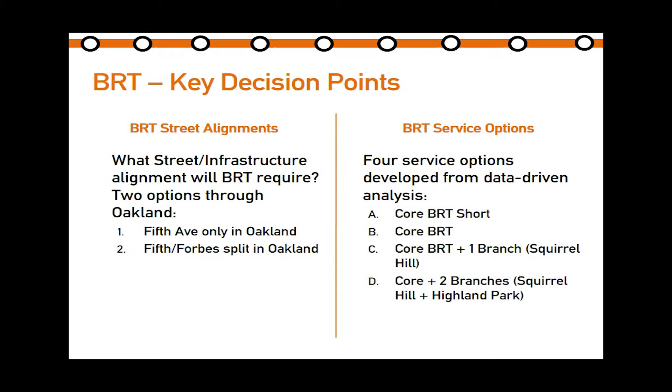So in a nutshell, what will this project be? The first goal, of course, is a fast transit system—saving time on trips from downtown to Oakland, to the East End, using dedicated transit lanes and dedicated transit signaling. It needs to be frequent, so we're looking at 5-minute or better headways during peak hours, so you can reliably catch a bus anytime you need to. As the county executive mentioned, the vehicles will be very distinct, so they're branded vehicles.

They have features that are above and beyond what you find on a normal bus. The stations also have more features—larger stations with real-time arrival information, ticket vending machines, and other features way above and beyond what you find at a normal station today. And of course, connected—connecting all of our major job centers, linking downtown, uptown, Oakland, and points in the East End with a rapid one-seat ride.

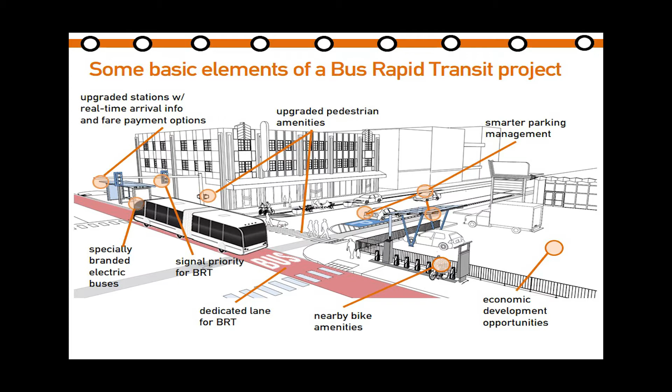There's also other amenities nearby, bike amenities. We've got plans to manage parking smarter, and we have economic development opportunities that open themselves up around station areas.

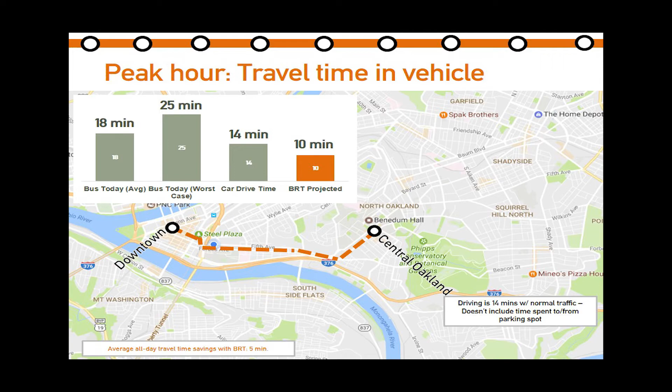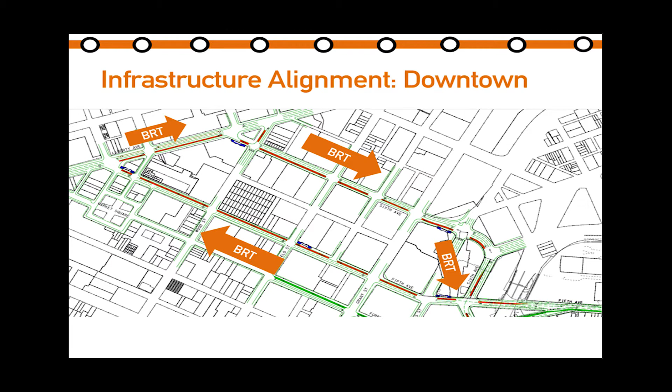Some key points about the actual infrastructure alignments. The way it would function downtown is actually somewhat similar to how Oakland buses circulate today, except the loop would be reversed. The BRT vehicles would come into downtown on 5th Avenue, make a right turn onto Liberty, a further right turn onto 6th Avenue, and head outbound. This is a zoomed in version of what that looks like.

So why this particular alignment? This is similar to the current operations, so people are already familiar with where Oakland buses go. Building up really prominent station areas will only further solidify that. We're also looking to locate station areas near other rapid services, linking with the light rail system and other stations that serve the busways in the region.

It's just more efficient to make right turns, especially downtown. You know how some intersections can get gridlocked, so if we're shifting that pattern, anything we can do to speed this service up is something we're looking at doing.

The pedestrian circulation around the crazy intersection at Liberty Avenue, 6th Avenue, and 7th Street would be improved through the Wood Street Station area, trying to make that circulation a bit better. We know we need to provide safe pedestrian access across Liberty Avenue to serve the cultural district, so that is a key part of that station area plan.

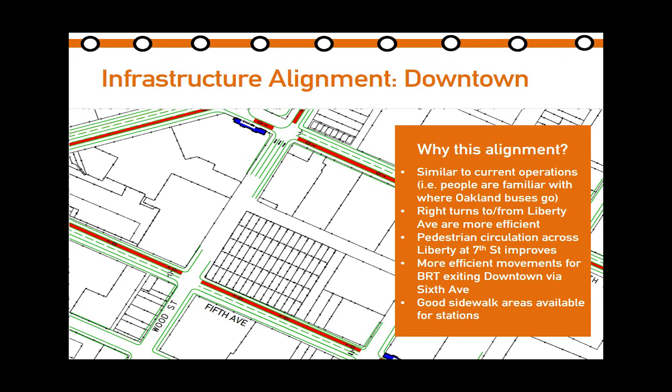Overall, more efficient movements for BRT as it exits downtown via 6th Avenue—another key pinch point that I'll talk about in the next slide.

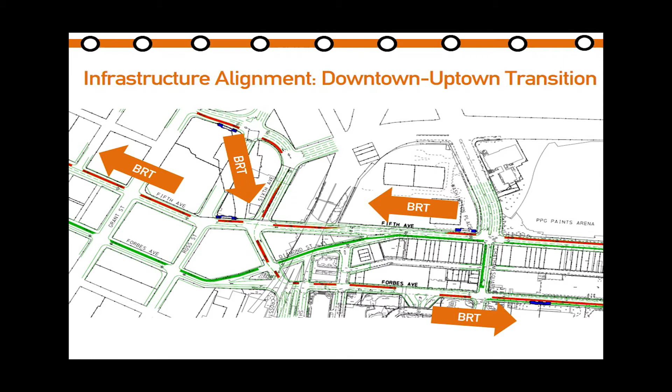This transition area between downtown and uptown is another very unique Pittsburgh situation, with multiple key arterial streets crisscrossing each other at strange angles. What this BRT system would do, exiting downtown via 6th Avenue—currently it makes a right from 5th Avenue, and this intersection at 6th and 5th is very congested—is allow BRT vehicles to circulate through here a bit easier. You can also see the green lines on the map represent where we would be building dedicated bike infrastructure as well.

A few brief notes about Uptown. We've been working over the past 18 months or so on a plan called the Uptown Eco Innovation District. It's been a major initiative that not only helps us understand what we should do with the streets in Uptown and solve a lot of Uptown's mobility issues, but has also helped us identify other projects we could implement to further capitalize on the potential for new development in Uptown as a result of bus rapid transit.

Looking at infill housing development, better stormwater management, things like safer intersections, more street trees, better lighting—these are all things that Uptown community members have identified as major issues we are hoping to address through this project, with BRT station areas being key among those.

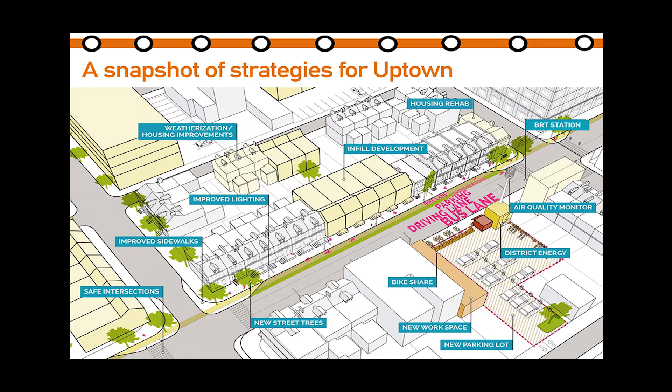One of the recommendations of this neighborhood plan that we've been working on with the community is to implement bus rapid transit as a way to address a number of community priorities. So one of the things we've identified through that planning process is what the alignment in Uptown should be.

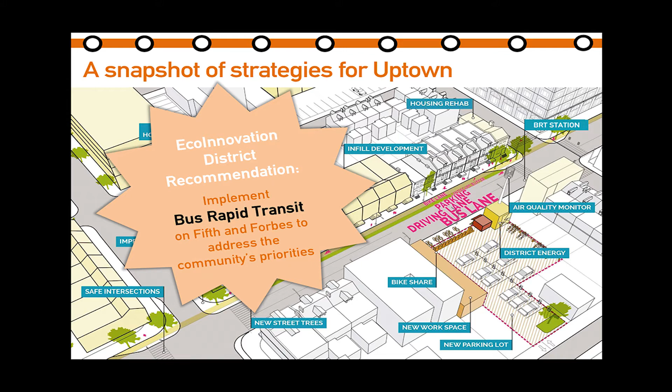Here's a quick rendering of a multimodal reworking of Forbes Avenue—a section where you see a car lane, a dedicated BRT lane with a station that has an accessible entrance, and then a bike lane that circulates behind it, along with more street trees and better lighting.

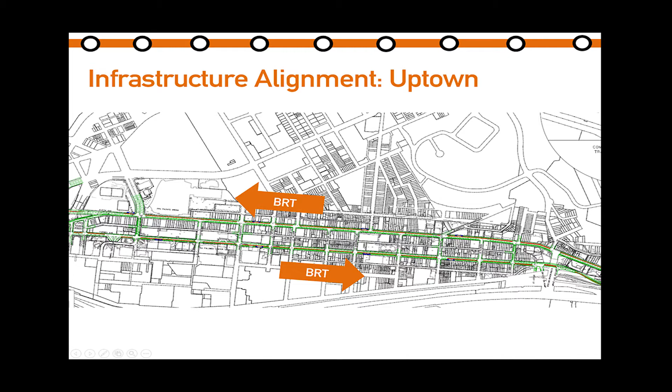Part of that has also been helping us to identify what the alignment should be. Looking at circulation, we've got everything, all modes from bike, car, BRT, everything flowing towards Oakland on Forbes Avenue, and inbound towards downtown on 5th Avenue, similar to how it functions today.

But the difference between how it functions today and what this would be is a balanced allocation of street space. Every mode gets its own dedicated space. It allows for intuitive circulation, meaning everything flows in the same direction. So if you're on a bike, on a BRT vehicle, or driving, you know which way you're going, all the modes are in the same direction. It allows for those in-street island stations like you saw in the rendering.

We have more space in places that aren't station areas to do innovative stormwater management approaches. Uptown is a key area for PWSA in terms of stormwater management, and so we're helping to address some of those problems through this project as well. Of course, having the BRT on both streets spreads out the economic development potential, having stations on both streets.

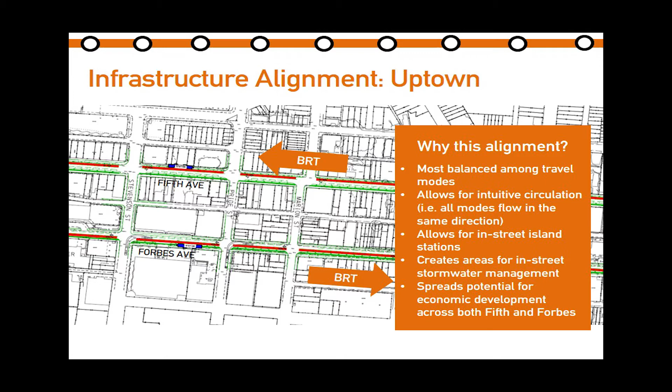Looking at the Uptown to Oakland transition area, another one of our very Pittsburgh pinch points where you've got a lot of different roads converging in one place. We're looking at the same circulation, with BRT on Forbes Avenue towards Oakland and towards downtown on Fifth Avenue. Some notes for this section.

What we're looking to do is add capacity to Forbes Avenue between Boulevard of the Allies and Craft Avenue. This section, if you're familiar, as you make that turn from Forbes Avenue headed uphill towards Oakland, it's a pretty notorious spot for backups. There's a lot of congestion at that point. So through this project, we would be adding a BRT lane as you approach Craft Avenue, but also adding more space for the road in general so that overall circulation into Oakland happens much smoother than it does today.

It allows for that reliability of the BRT, but it benefits all modes, so it minimizes overall what we're calling person delay for everybody heading into Oakland. What we're looking to do with that capacity addition is basically reduce the travel time in that section, from around Birmingham Bridge to Craft Avenue, by between 50 and 60%, which is significant over what the experience is today.

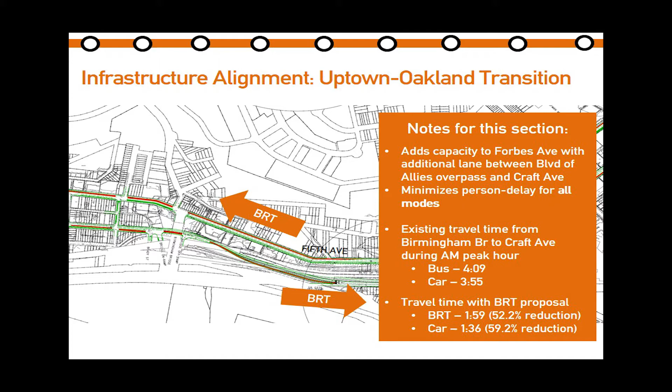And then in Oakland, we're looking at two different options. We have some notes about each of them that I'll share with you, but one of them, what we're calling option one, is having all the BRT on Fifth Avenue. Zoom in version of that, and you can see how that operates.

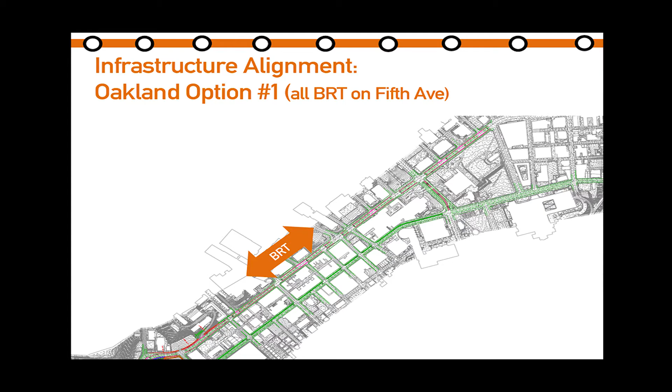You've got the contraflow bus lane that exists today. We would be maintaining that, but adding station areas. We have a dedicated inbound BRT lane that would be added. Bike infrastructure in this scenario would be on Forbes Avenue.

Through some of the work we've done with our stakeholders and other community partners, as well as analysis we've done with the Port Authority, we have some concerns about it, and we want to make sure that as we go forward with the public process over the coming month, that we're on point with this, and we want to verify that these observations are correct.

So, if anybody's familiar with how the contraflow bus lane works today in Oakland, there's a fence along Fifth Avenue on the southern side for a reason. It's confusing for visitors, and there are quite a few of them, with the hospitals and the university. So that conflict there, in this scenario, would be maintained, and it's somewhat of a concern in terms of people walking in that area.

In this scenario, all the transit would be moved to Fifth Avenue, which folks on Forbes Avenue and the business owners there have told us they really like, the exposure of having transit riders at their front door and the good visibility of foot traffic that provides. The bike infrastructure through Oakland is a vital connection, getting downtown to Oakland via bike safely.

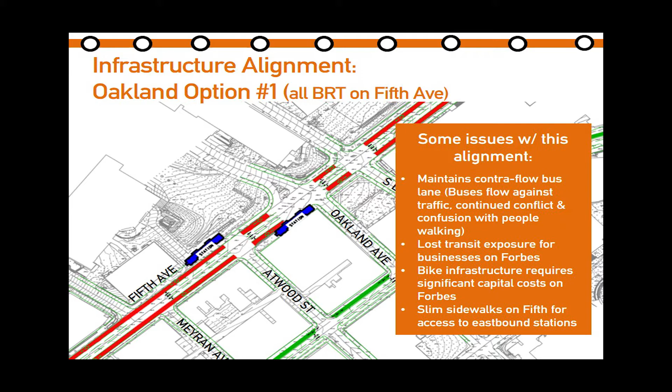It's a bit more capital intensive to do that on Forbes Avenue here. And again, the sidewalks on the southern side of Fifth Avenue are pretty narrow, so for overall pedestrian circulation, it's not ideal. The other side of this is option two, where we split the BRT between Fifth and Forbes, similar to operations in Uptown.

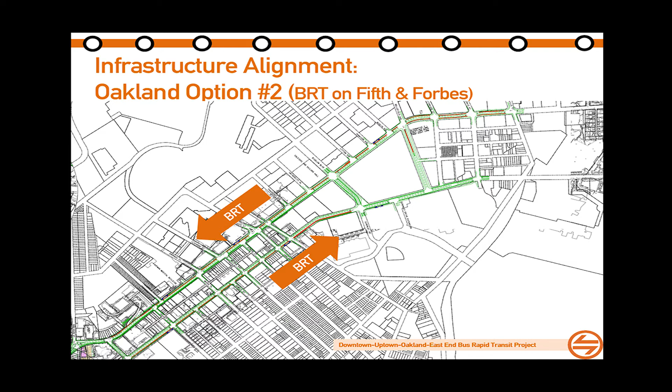We'd be maintaining that same flow. This option formalizes what is almost a de facto transit lane now on the south curb of Forbes Avenue, on the right side if you're headed in that direction. We would formalize that as a BRT lane, maintain inbound traffic for BRT on Fifth Avenue, and where there's currently a contraflow bus lane on Fifth Avenue, we would change that into a two-way protected cycle track.

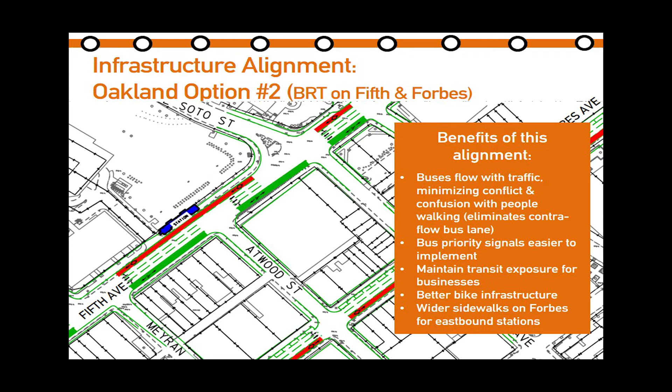So again, balancing out the modes in Oakland, spreading it out between Fifth and Forbes. The benefits of this alignment are the flip side of our concerns with the other option. Everything flows with traffic, minimizing conflict and confusion that happens on Fifth Avenue with the contraflow lane. It makes it easier to implement bus priority signals if traffic flows in consistent progression. Transit riders are exposed on Forbes Avenue, patronizing the businesses in Oakland, and we have better circulation on Forbes Avenue for people getting to the BRT station.

So something to consider as we move forward with the community. The other side of this is the service, which is new in terms of our discussions with the community. Amy Silverman will be discussing that.

Thanks, Justin. Good morning, everyone. In addition to those two infrastructure options that Justin walked us through in Oakland, another key thing we've been working on over the last several months is what to do with the actual BRT service—where will it end and how will it work best?

To give us some context, our existing transit service in and around Oakland is very, very complex. We have 19 bus routes, and as the Mayor and County Executive mentioned, over 60,000 bus riders every weekday use those routes. They go all over the East End, including the north and south side, so we don't have a simple one-route solution that's easy and would accomplish this benefit for all of these riders.

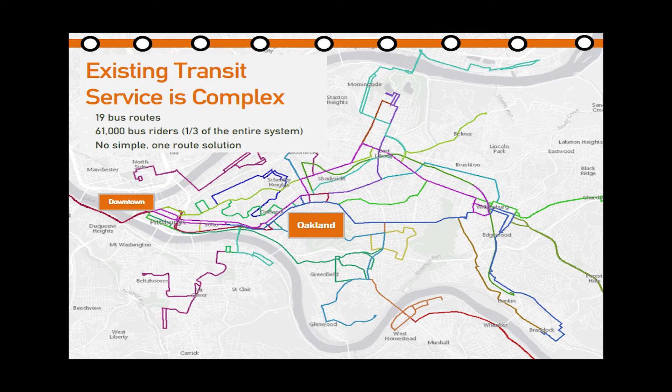So we had to look at a lot of different ways of making this service work best for as many people as possible. We started by looking at existing research on what is most important to transit riders. What we found is that the two key things a BRT would certainly accomplish are frequency and reliability. But beyond that, we have other things like travel time, and whether you have to transfer or have a one-seat ride.

What are your station amenities? Do you have a ticket vending machine or real-time information to tell you when the bus is coming? Lots of different things are really important to transit riders, and we used those—actually 15 different metrics—to come up with as many possible ways to make this BRT successful as we could. And we ended up with 42 different service options.

So a very data-driven, analysis-based process. We looked at all of this sort of crazy Excel matrix of what it looked like behind the scenes. What we're moving forward with into our public engagement period, beginning today, is 4 of those service options. The first we're calling the Core BRT Plus 2 Branch.

It scored number 1 amongst those 42 options—a downtown through uptown into Oakland, connecting to our East Busway and ending in Wilkinsburg, BRT. That would also have 2 branches: one would continue out Forbes Avenue into the East End, serve Squirrel Hill, and terminate in Greenfield. The other would continue out 5th Avenue into the East End, then go up Highland Avenue and end in Highland Park. I'll show maps of each of these after we get through this part.

So other than - oh, and this is just our on-street map, so actual schematic - other than where these 4 different service options go, we have a few other key differences between them.

So first of all, connected neighborhoods. Obviously you can see on the map that with some of these options we're connecting a lot more places than others, so our Core BRT Short may only be connecting downtown, uptown, and Oakland, whereas at the other end of the spectrum, our Core BRT with 2 branches connects 24 different neighborhoods and municipalities within that rapid 1-seat ride to Oakland and downtown.

The next 2 columns show our existing riders under the 8 core bus routes that exist between downtown and Oakland today, and additionally our P3 route, which is our East Busway to Oakland route. How many of those riders today would be able to use the BRT if it all of a sudden existed tomorrow? So without even doing any ridership modeling or projecting, we already would serve between 20 and 31,000 riders on this BRT, just under existing conditions, which serves up to 70% of our existing riders under the BRT.

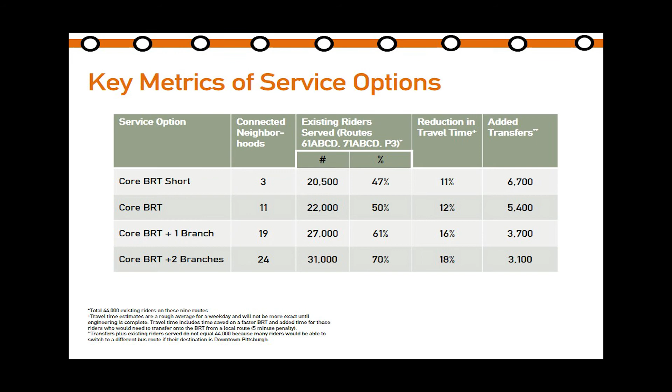So some issues we still have to address going forward as we move through public engagement on this process: fare policy is a big key one, especially with those transfers we just touched upon. If you have to transfer and that transfer has a cost, that's certainly something we want to hear from the public on, about how best we can work that fare policy.

Accessibility concerns. Our access paratransit vehicles drop off on the curb right now, and so adding bus lanes to the curb between downtown and Oakland means we need to make sure we figure out how best that's going to operate within our paratransit community.

Station spacing. What we're proposing in areas where local buses and the BRT are mixing together is a sort of happy medium of station spacing. In Oakland, that's something like 1/3 of a mile, and beyond Oakland for the 2 branch options, something like 1/4 of a mile. In those areas, the local buses and the BRT, if there's overlapping service, would use the same stations, and therefore there are fewer stops than we currently have, so that's an accessibility issue we want to hear about.

And then finally, cultural district access. We know that Liberty Avenue can be a challenging one to cross if you have accessibility needs, and that's certainly something we want to keep forefront of our minds going forward. With other projects happening around Liberty Avenue, we're confident we can address that.

Downtown bus routing changes will likely need to occur in addition to this BRT, because we're switching the direction of that bus flow in downtown. Other bus routes will likely also need to be changed as a result. The exact station location and design is still to be worked out - we're not at that level of detail quite yet. And finally, loading zones and deliveries, similar to the access paratransit vehicles, how we can best make sure those still remain successful throughout this corridor with our BRT lanes.